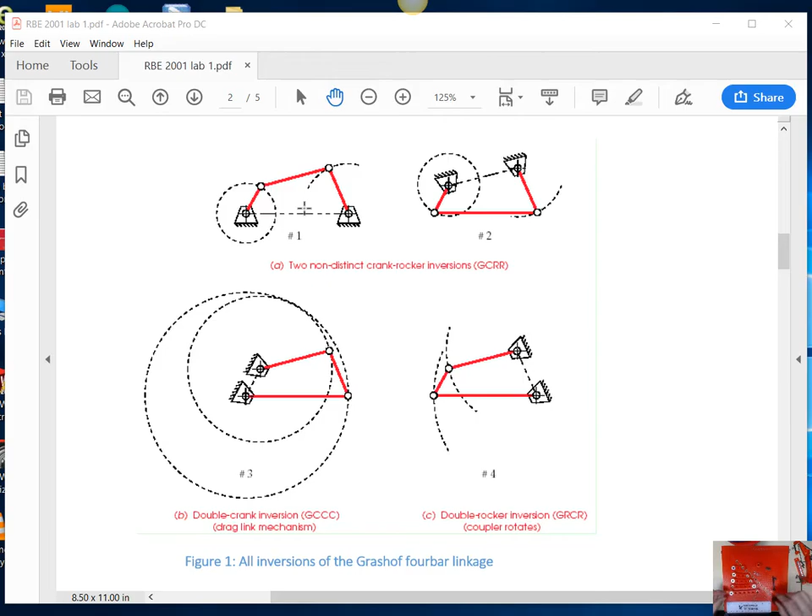Okay, so if we look at the links that you have in your box, you can see that you're going to need 3 of these screws right here, which are about 12 millimeters. They're M5s, they measure about 12 millimeters long. And then you need this one, this one's about 45 millimeters long.

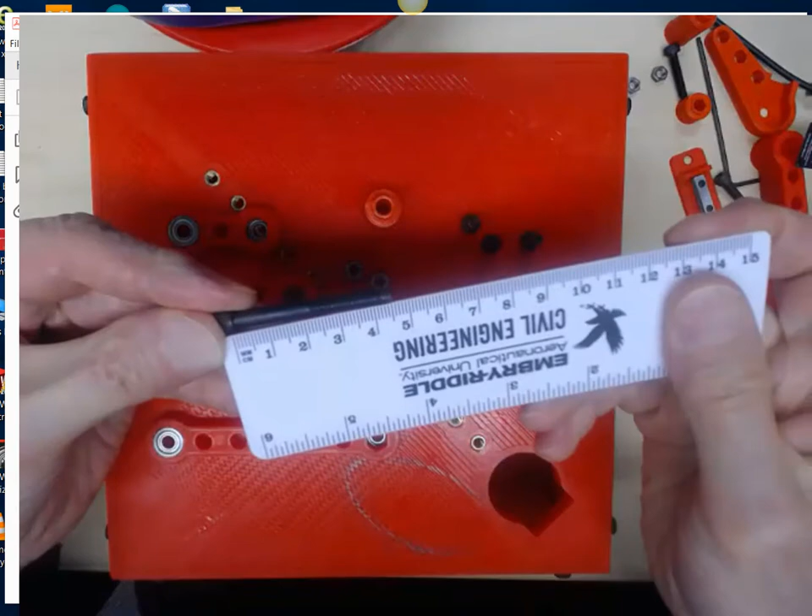You need a couple of M5 nuts, and you need this 3D printed part here. So this bigger, larger diameter section here, you can see it's about 20 millimeters.

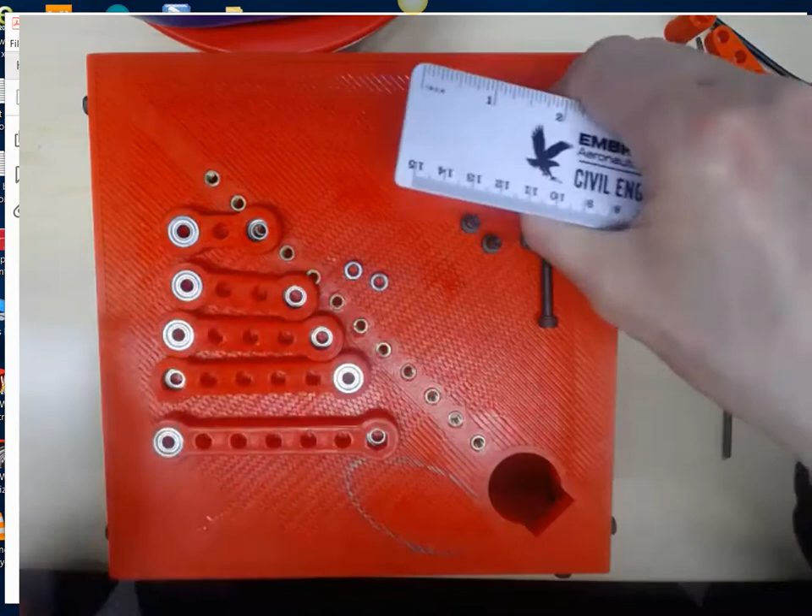So you have to pick a combination of links that's Grashof. And the holes are 15 millimeters apart. So you can see that, if you start from this end, you go 1, 2, 3, 4, 5, 6. So this would be 90 millimeters from joint to joint, and so on.

So this is 75, 60, 45, and 30. So if you have this as your shortest and this one as your longest, so this is a 30, and this is 1, 2, 3, 4, 5 times 15. So this is a 75.

The other way you can do it is just say, think of this as a 2 times 15. So then it would be 2, 3, 4, 5, 6 in terms of the lengths. So a 2 and a 5 is 7, and a 3 and a 4 is 7. So that's actually Grashof. It's case 3, a special case, but that would work.

You could also do 3, 4, 5, 6. 3 and 6 is 9, 4 and 5 is 9, so this would also be Grashof. I'm going to work with these 4 right here.

So if we want to start with the first case, you have these parts here, and I'll start with this link right here. So this is the 2, and then for that, I'm going to connect to this one right here. So what I want to show you is that on one side you just have a round hole, and this one is a hex, so the nut fits inside of that.

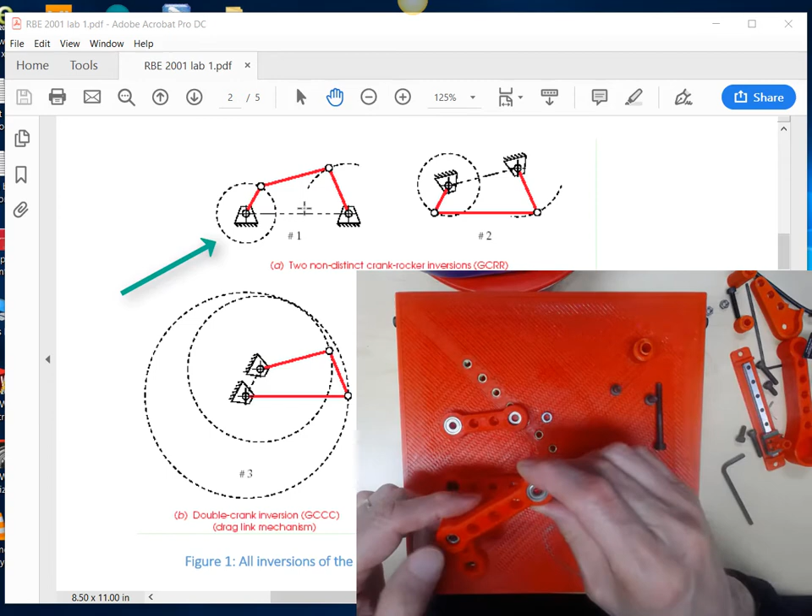And so again, I'm working on this case number 1, and so we have this, the ground part is actually going to be on the table on this one. So next, let's see, I'm going to connect that to this one here.

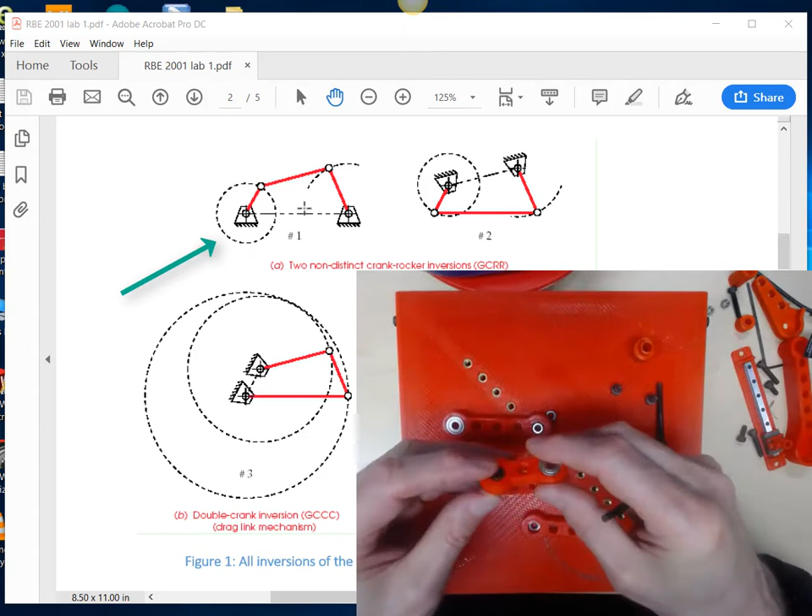Okay, I actually have this one backwards, so okay, so for this particular first one here, I'm going to have this one be grounded, so I want the round one here, and I'll put the hex on this side, and then use one of these short screws to go through here. And as I said, you don't want to over tighten this.

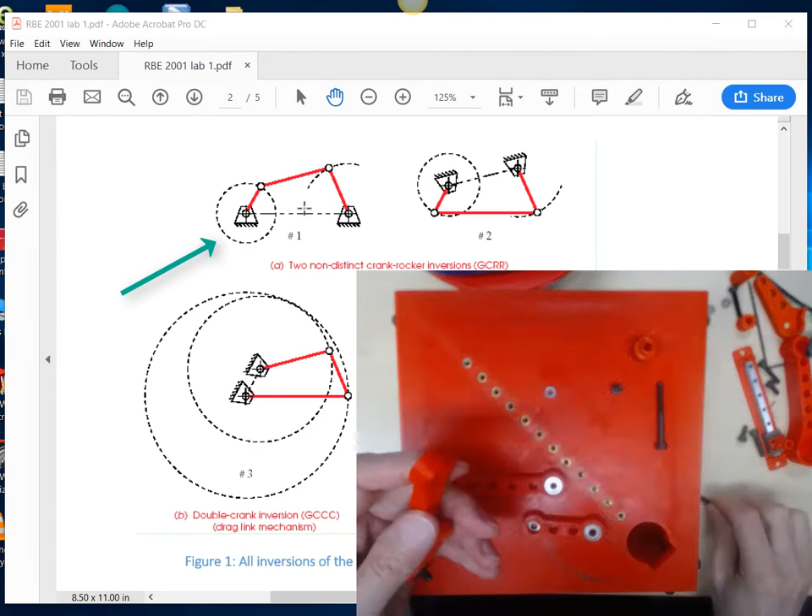Okay, so now on this one, we'll put a hex, and then we'll use this one right here. Whoops.

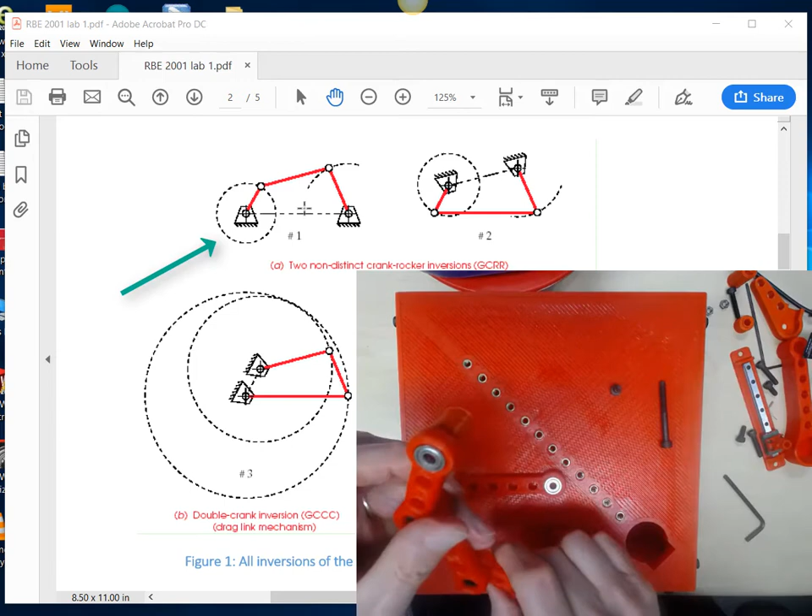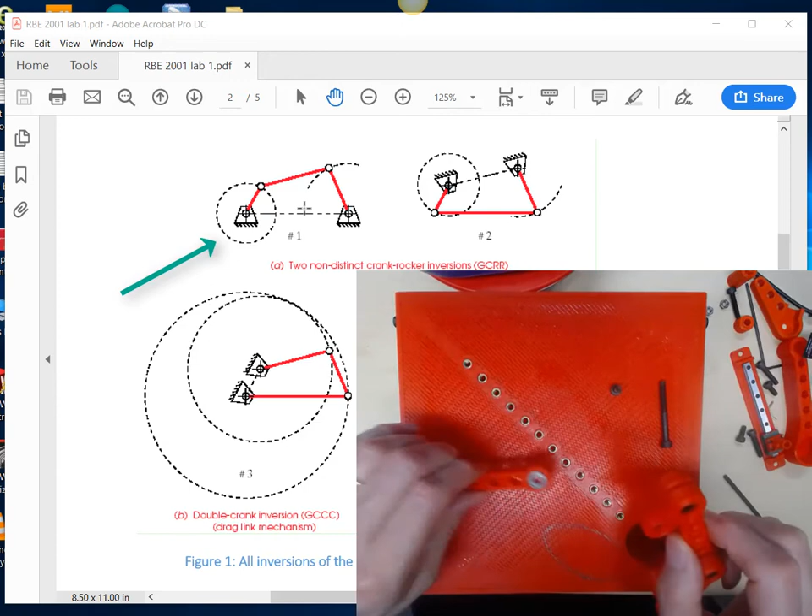Okay, put these two together, and then you can take this part and this will just kind of snap in there. So now what we want to do, we have a 2, a 4, and a 3, and the 5 will be the actual ground. So I'm just going to turn this like this.

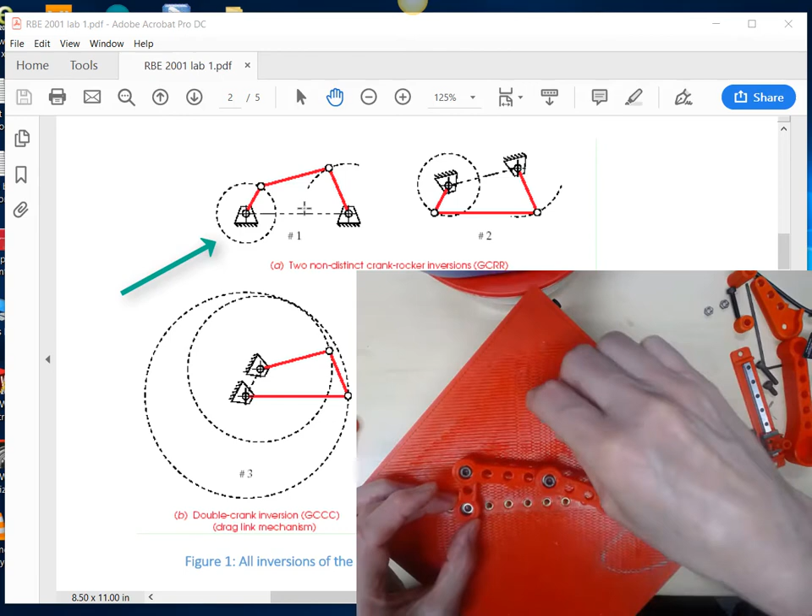Again, we don't need to tighten this up too much. Now I can go 1, 2, 3, 4, 5. So this one, and this will be the long one here. And when you do this, you just have to get it started a little bit here.

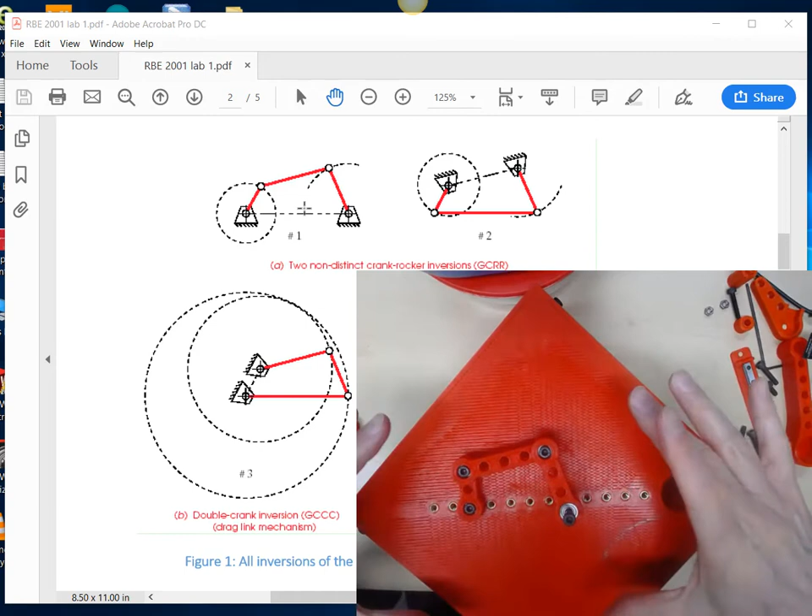So when you do this, you're actually going to put a piece of paper on this, and then you can take a pencil and push that through. Now you'll be able to, as you rotate this around, I have that a little bit too tight, and you're going to have to move the pencil when this passes over here, then put the pencil back in.

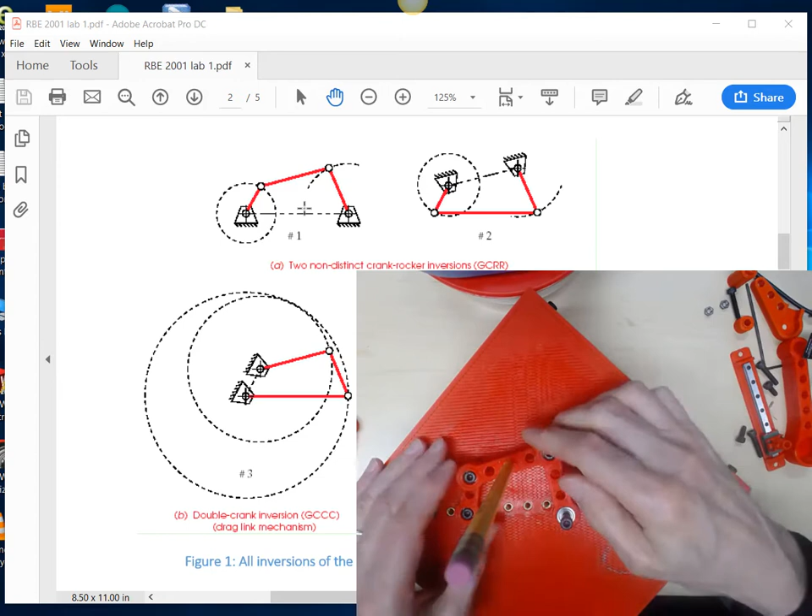So that you're going to be able to trace out the coupler curve. Now I'm just going to take this out here. So in other words, you'll have the paper down. Make sure you sketch out what link is grounded. So this section right here, you'll put in some 45-degree crosshairs there, and you'll see that that will be grounded.

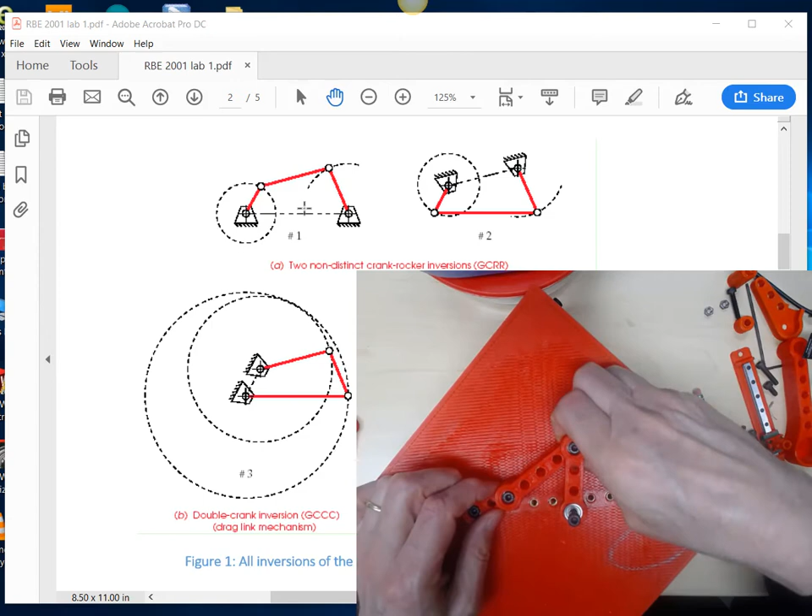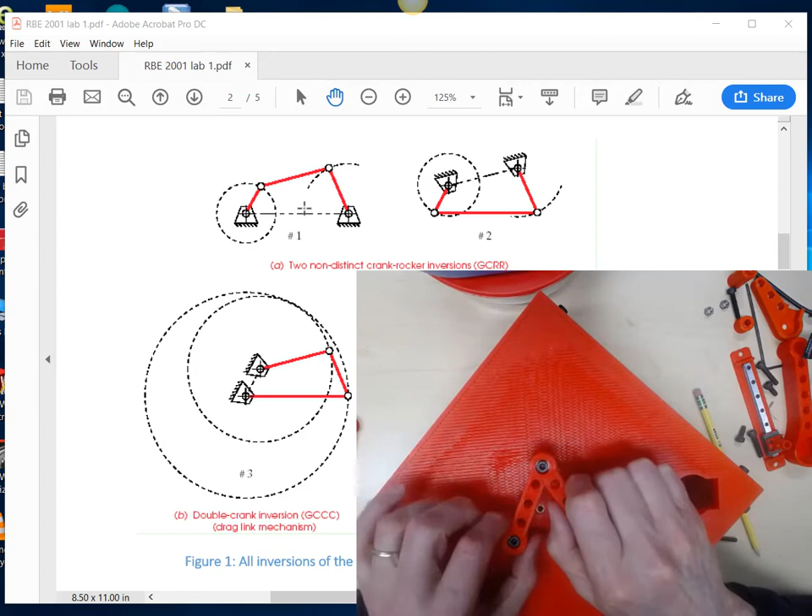Now one thing you'll notice is when you get to this toggle point here, this one could come down, right? You could just keep coming down like this, as opposed to, in the other choice, because it's a toggle point, it could go up. So I would say just pick one case like this, and sketch it out on the paper. I'll actually come back and do that in just a minute.

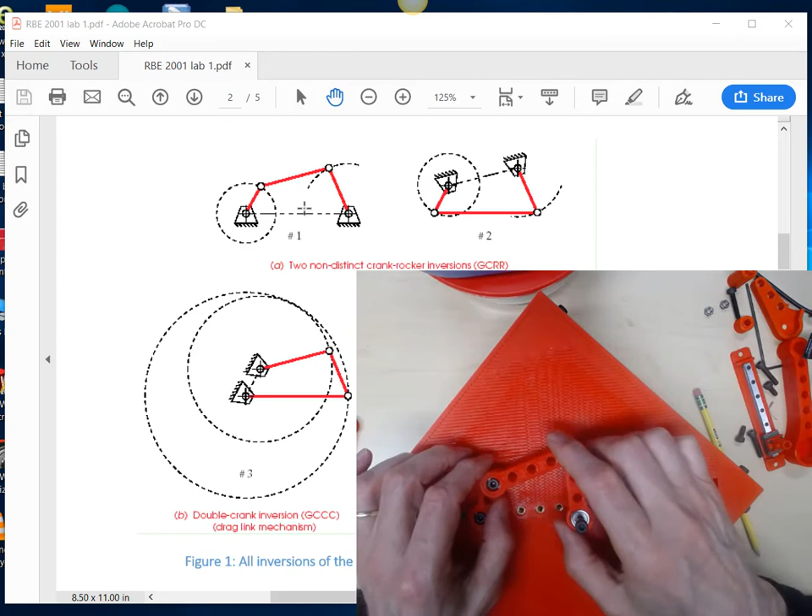But let's look at the other cases. So that would be number 1. What about number 2?

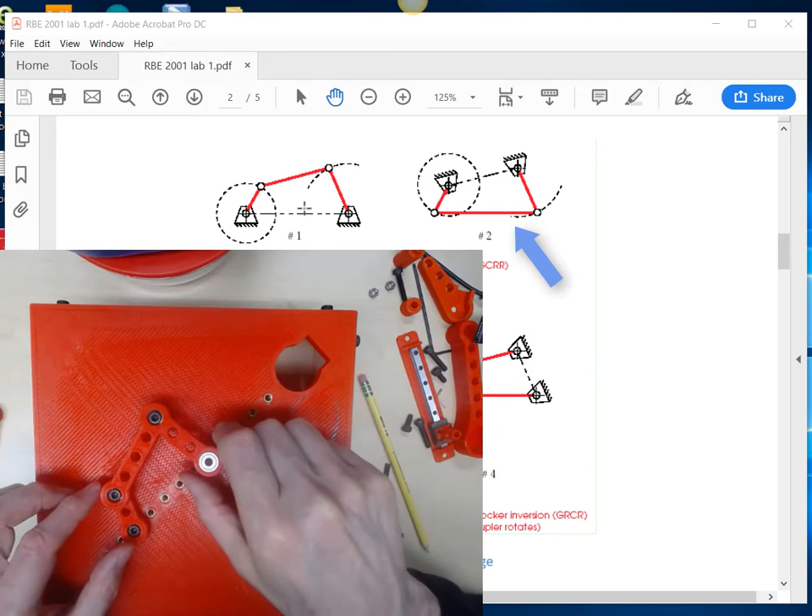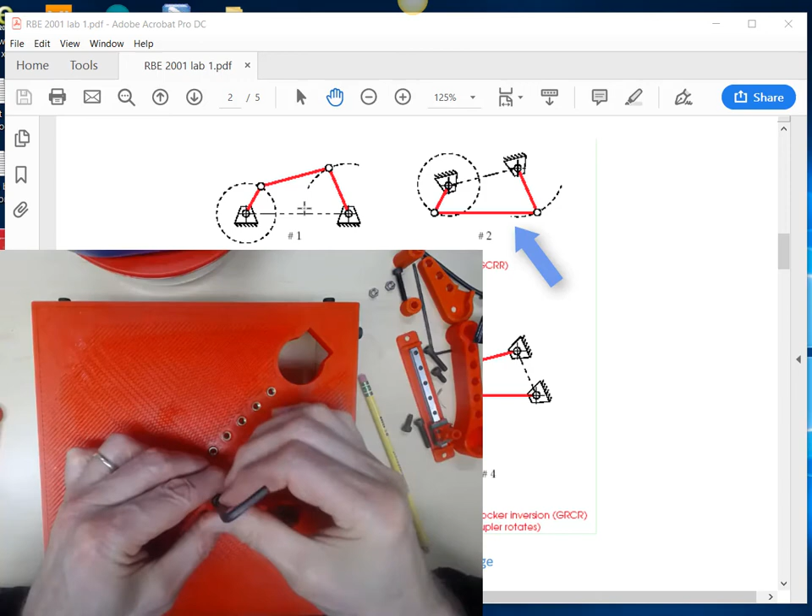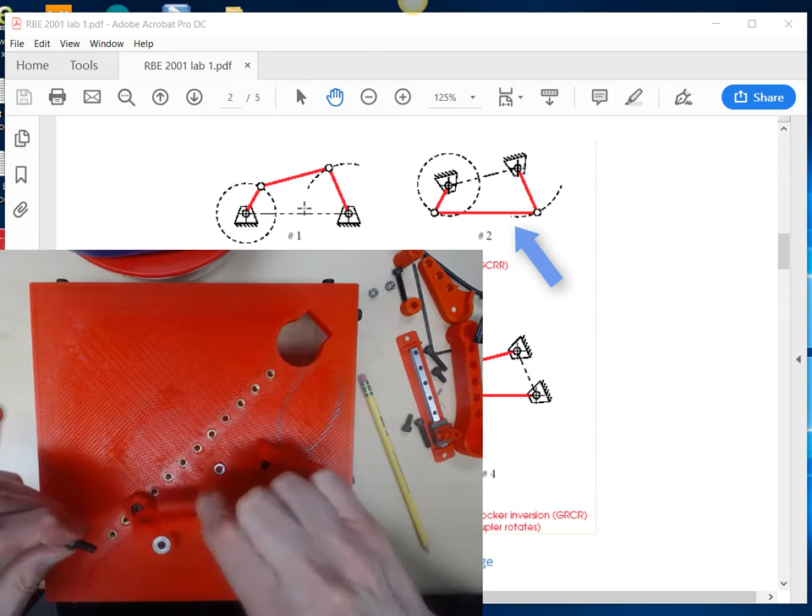Okay, so in figure number 2, take this apart, and in figure number 2, it's going to be not the 5, but the 4 that's going to be actually grounded. So we're going to have to take this apart and we'll put the long member in here. So we'll replace this with this long one.

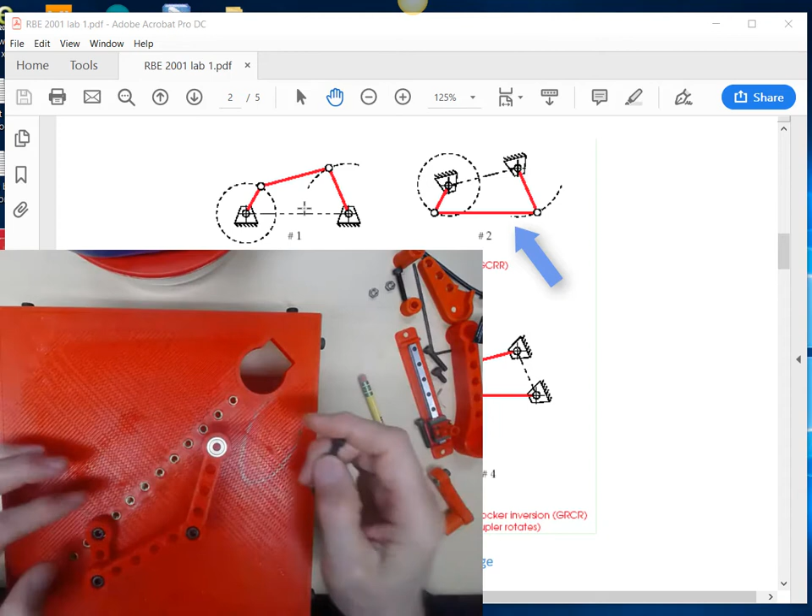And then in this section here, this is going to be 4. So 1, 2, 3, 4.

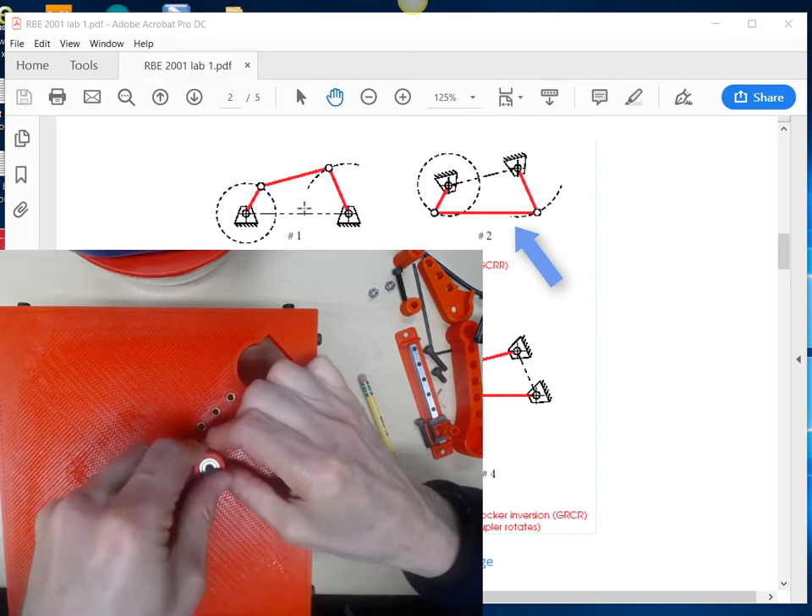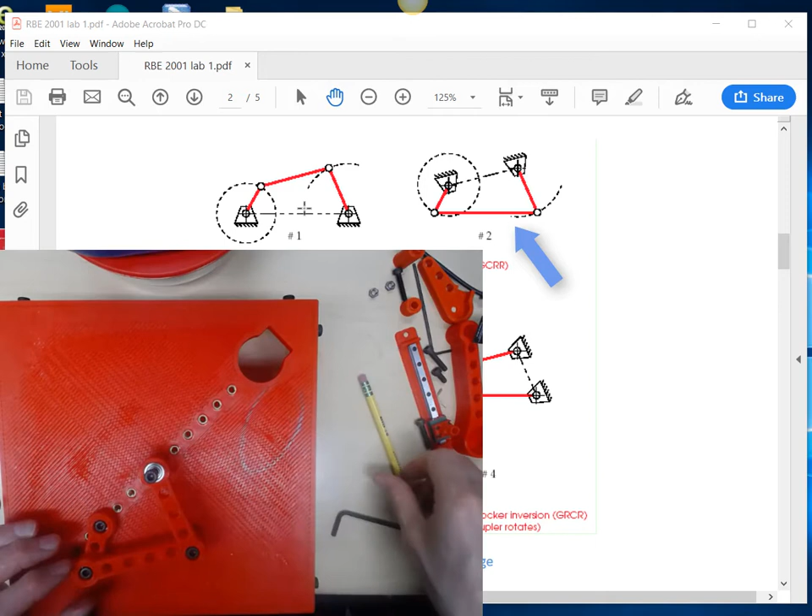Okay, and as I said, you'll have a piece of paper here. So now, again, if you look at Figure 2, this is approximately what you see on the lab handout for Figure 2. So again, you'll put a pencil in the coupler, and then trace out this motion, right, for this, again with the pencil in there.

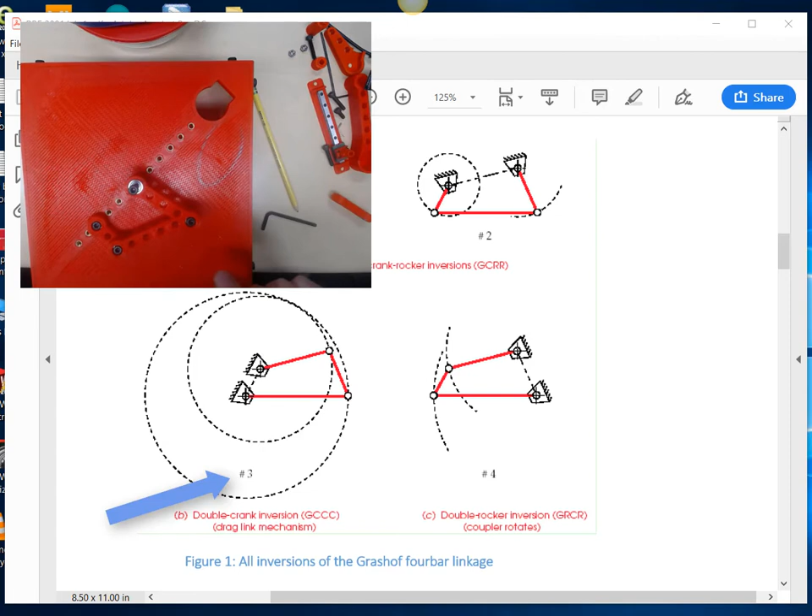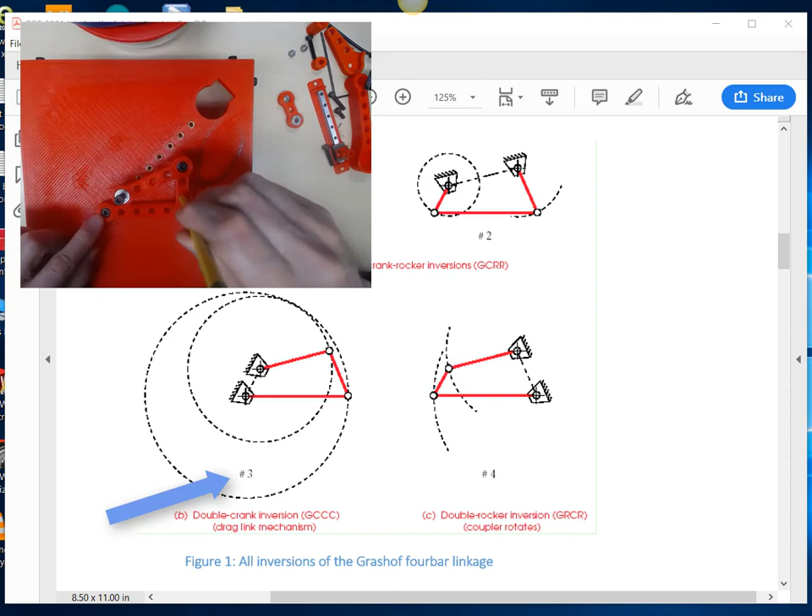Okay, so numbers 3 and 4, I'm just going to go ahead and set that up, and you can see that's a little bit more interesting. So let me just set that up. Okay, so this would be figure number 3, and you can see here you would put your pencil down in one of these holes and trace out the path.

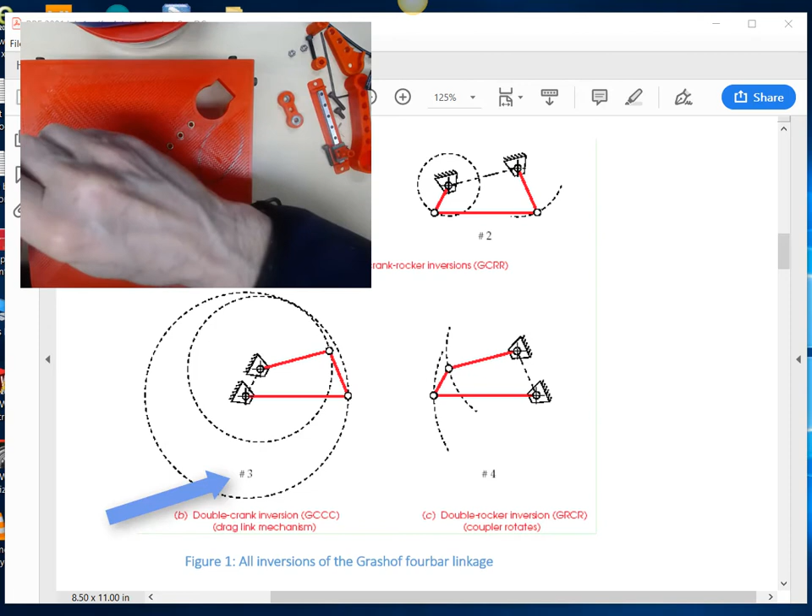And you're going to have a couple places where you're going to have to pick up the pencil, right, and then put it back down. In this particular case, you'd have to actually trace it out. You can see where the trace is going, but obviously, if this was actually held in place with something above here, above that hole, then this could continue on through.

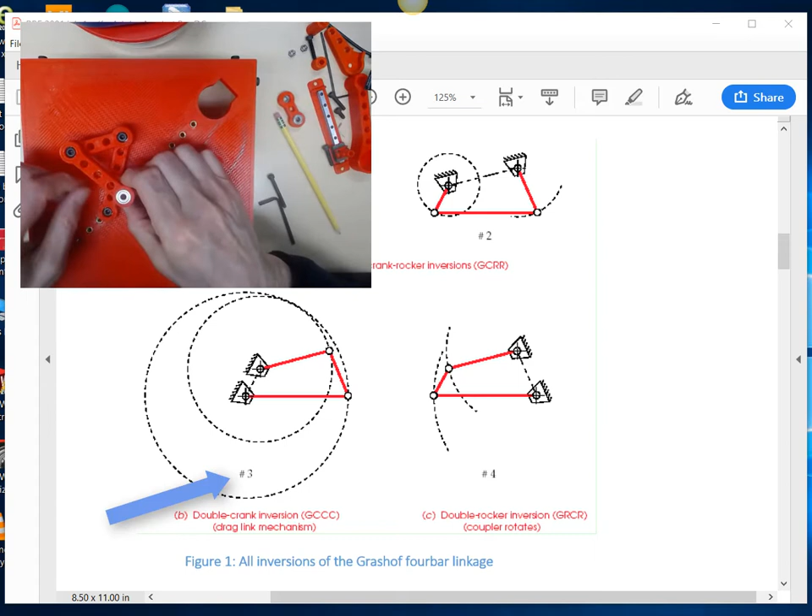And I'm not going to take the time to put that apart, but you get the idea that, in other words, this motion, you can see that both of these, the upper one here and the lower one, can do complete revolutions if this part wasn't in the way.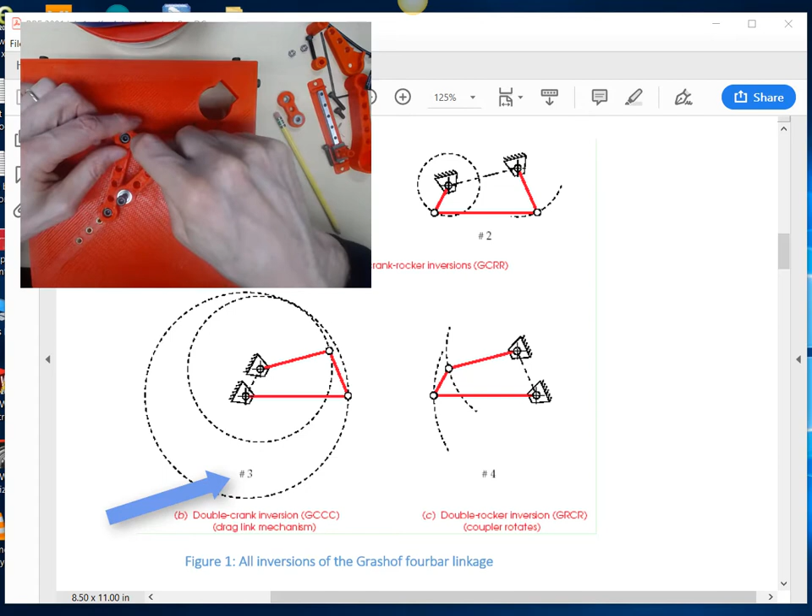So you can trace out the path of the coupler, what would be the coupler here, but you're going to have to lift the pencil up when it crosses. Notice that there's also a toggle point here, so this could continue in a motion like that or in a motion like this. All right, and now I'm just going to set up the last one, so I'll pause here.

Okay, so this is number 4 in the figure, and now you can see this is 3. This would be the 3, 2, 4, 5. So that matches number 4. I'm just going to hold this one in place, and you can see that this is a double rocker inversion, so the coupler itself will rotate.

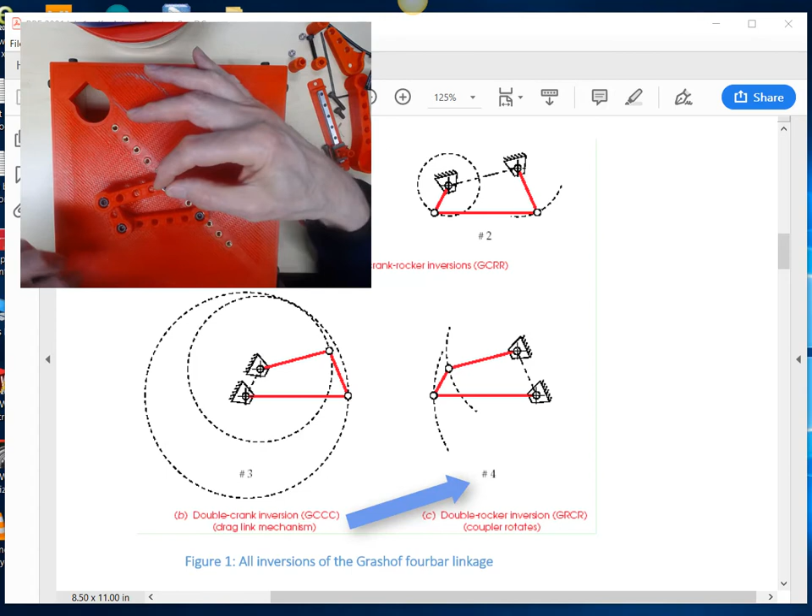It can go through the complete 360-degree rotation. So again, you would put your pencil in this hole, and where it's blocked, you're going to have to pick it up and then complete the trace to get that done. So maybe I'll go ahead and put the paper on now for one of these, so you can actually see it with the paper on it.

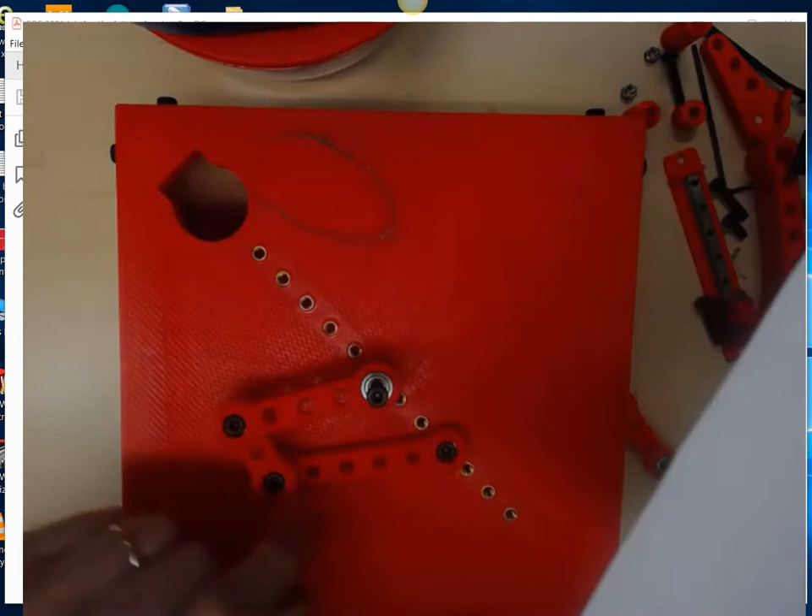Okay, so to make this a little bit easier, I'm going to want to put these bolts through. You can see they're 3 holes apart, so that would be 45 millimeters.

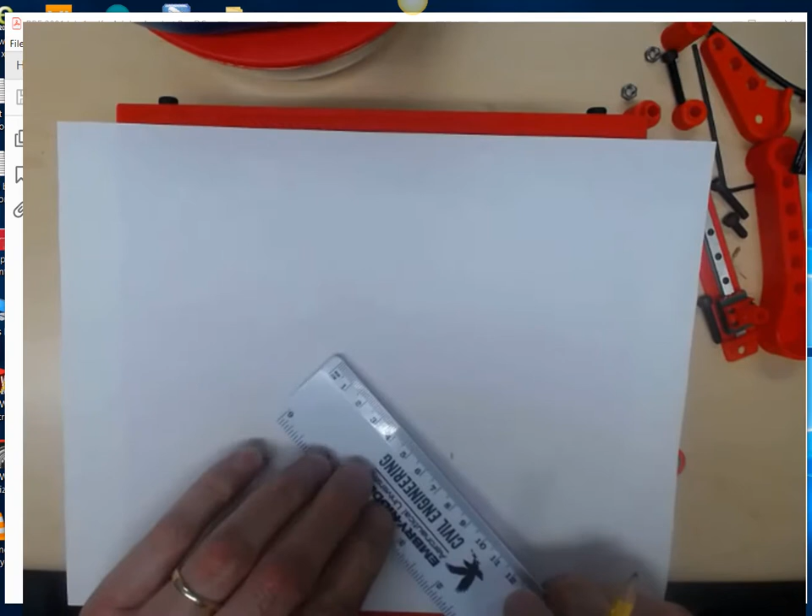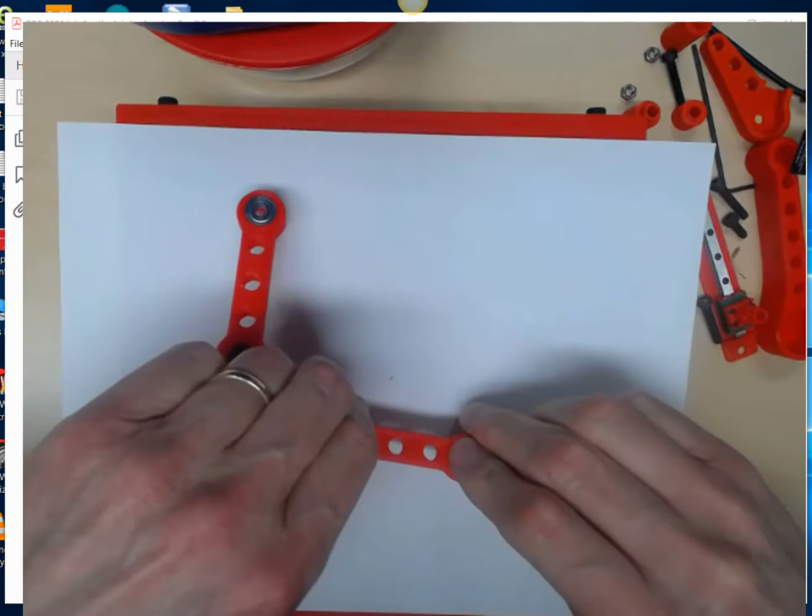So what I can do is pause this, take those out. I'll put a mark there, and then I know the other hole I want is going to be 45 millimeters away, so I'll put another hole here. Then I can just poke this through and find a hole, get that set up. And then I can find this hole over here. Okay, so there's that hole.

All right, so now we have this. First thing we're going to want to do here is here's our ground link. I'm just going to draw a line between these two holes right here, and we'll be able to sketch out that ground link. I'm just going to put some hash marks on here to emphasize that that's the ground link.

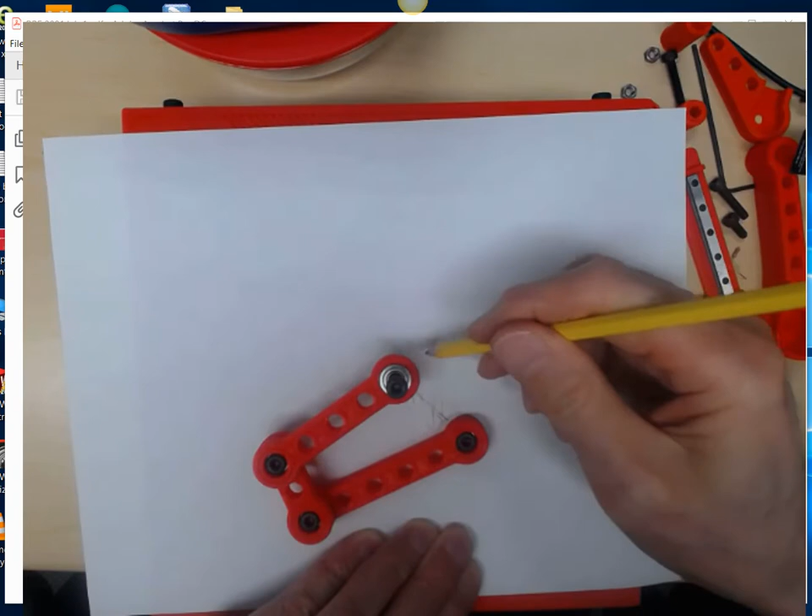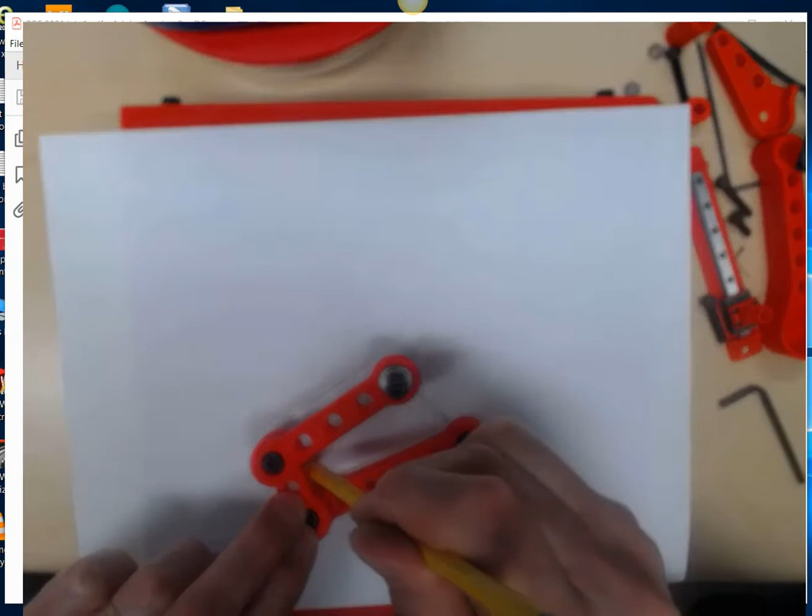Okay, so for a particular position we can go ahead and trace out these other links. Same thing with this one over here, we'll go ahead and trace that out. Okay, I'll move this out of the way here for a minute. Again, it doesn't have to be perfect. And here's this other link. So now you have the ground link there, and we've traced out the other links.

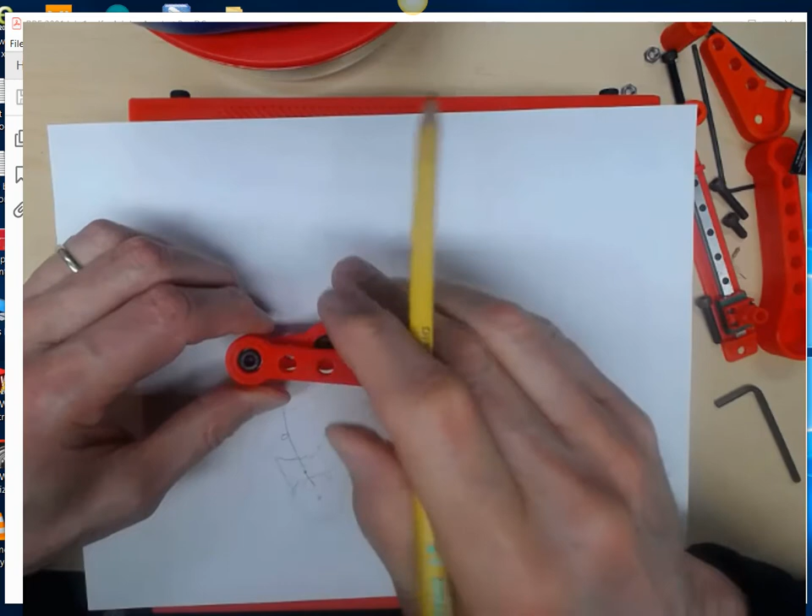And now what we want to do is push this pencil through and see if we can get the path, trace the path that it follows. Again, once you get to this spot right here, you're going to have to take the pencil out until you pass that point, and then it's coming back the same way. You can see that now it's actually down a little bit. This is probably the most difficult one because it keeps crossing over itself.

You can see that comes back this way. All right, so it comes back this way. I'm just going to take this out now. You can see that this would actually continue on this circular path to about here, and then it reverses, it's coming back this way. All right, I move that out of the way. You can see that that's going to come back approximately like this.

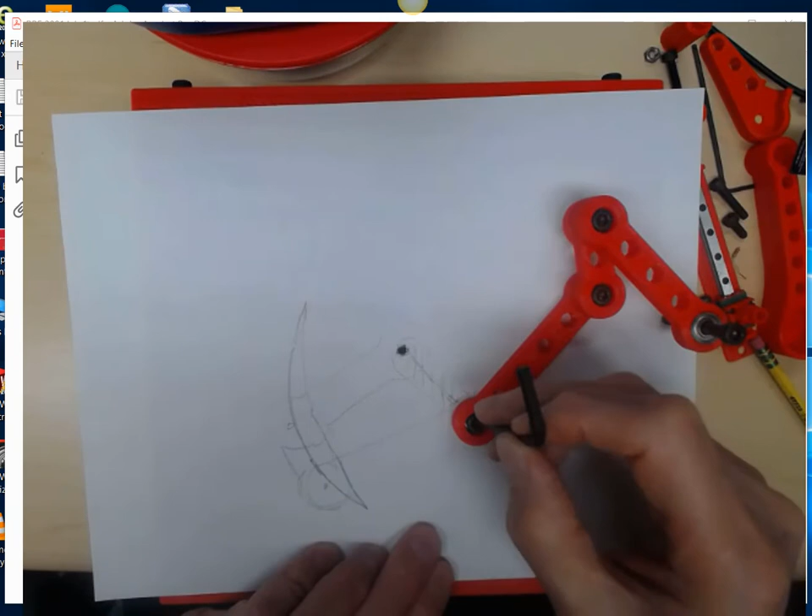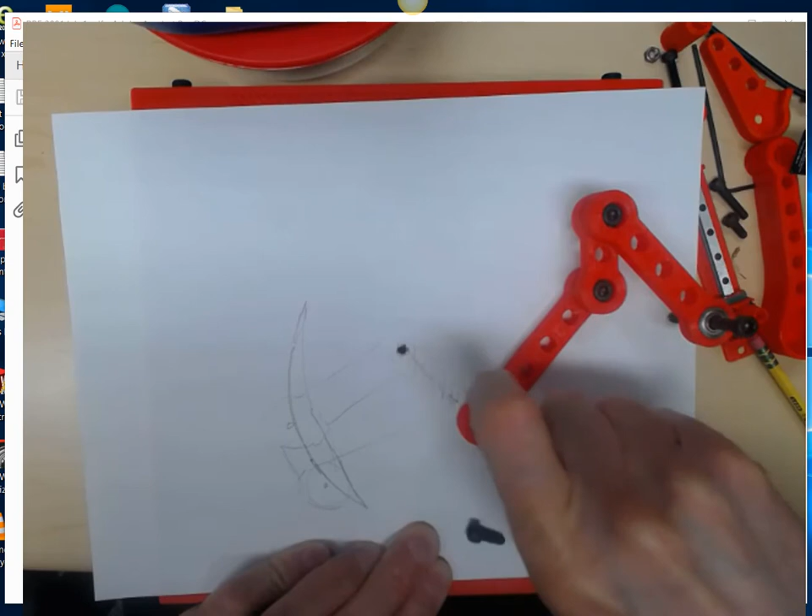Right, and you can see where this comes like that, and then it's coming back, and then it would move towards this section over here. Right, so about like this. So anyways, that's probably the most difficult one to do, but let me take that out.

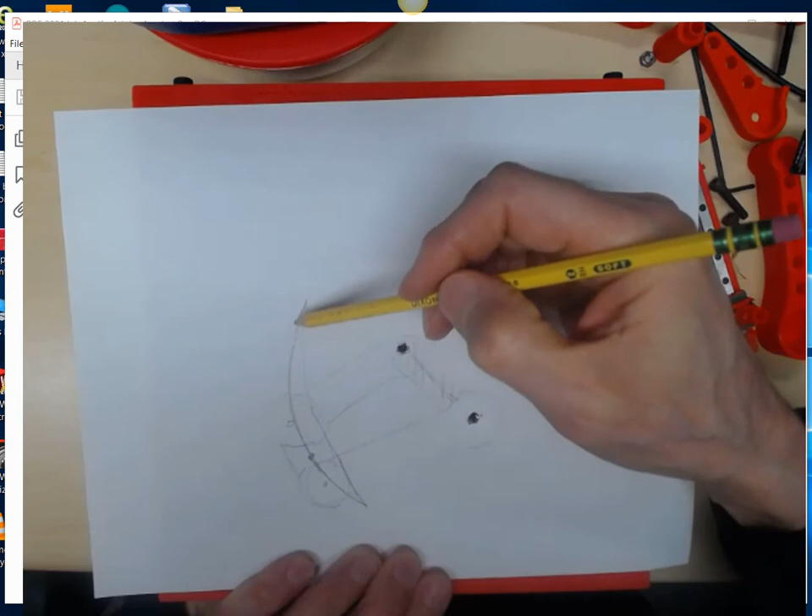And so there's the ground link, here's the other three links, and the spot that we were tracing was that part right there. You can see that the shortest link, that coupler point, goes through this type of path.

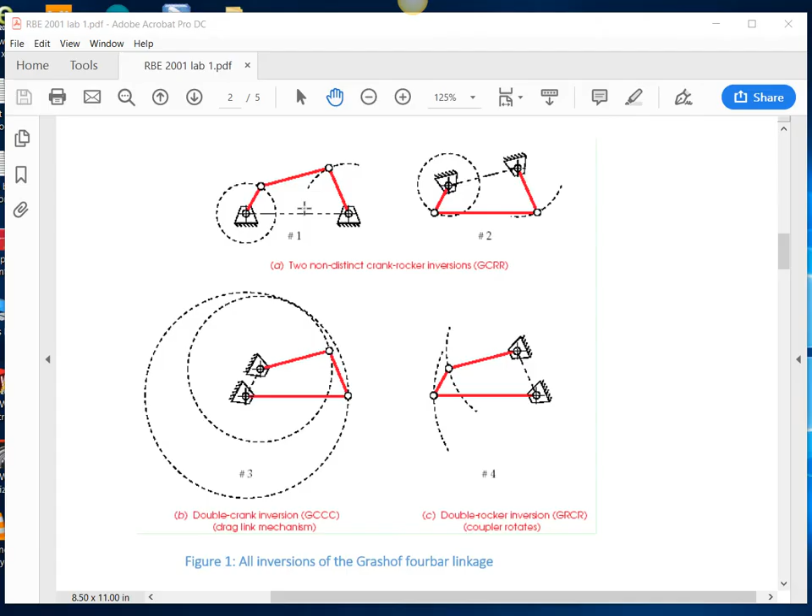Okay, so anyways, you'll have a sheet for each of these four inversions for the Grashof condition, and for the non-Grashof, you only have to do one of the inversions. So anyways, I hope that helps.